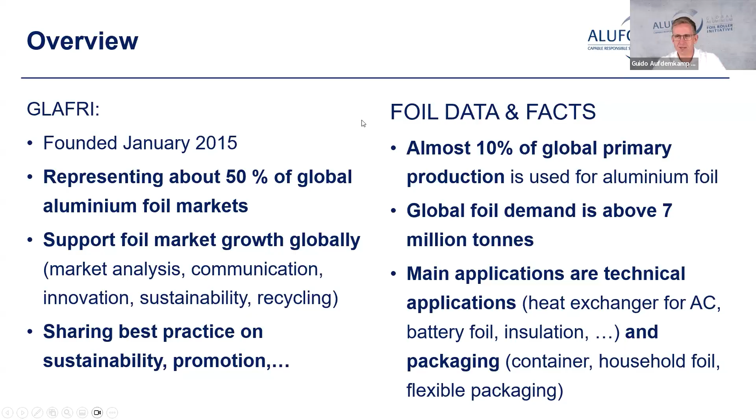Coming from an aluminium foil world, we have to consider also the language we are talking about. The aluminium world obviously talks about aluminium as a raw material, and often it is meant primary. That is usually the ingot form. It's the element raw material. When people using aluminium foil talk about aluminium, they actually mean aluminium foil. And that is all aluminium rolled below 0.2 millimeters or 200 microns. And that is usually delivered in coil form, as you can see here as an example.

That has a significant consequence, particularly when you talk about things like carbon footprint. So let's take that 4+ tons of CO2 equivalents are relevant for the primary production, and then you always have to add another ton for the foil production. So then obviously it makes a huge difference whether you talk about 4 or 5 tons. So please keep that in mind. I'll try to be always specific when I mean here primary aluminium or secondary aluminium or aluminium foil.

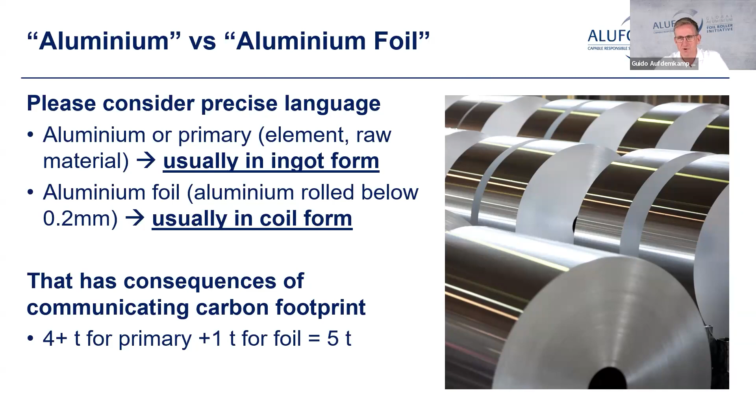So what is green or sustainable aluminium? That is often a question we are asked, how can we define green or sustainable aluminium? And meanwhile, we differentiate into 3 categories, so to say. So the most obvious one is the low carbon aluminium. That has a very direct environmental impact, usually even meant with low carbon primary aluminium. Then there is another version. You can have a high recycled content, which for all aluminium experts is clear. Then you have the direct environmental impact. And we will talk about how good this is as an indicator for green or sustainable aluminium. And the last and bit different one is the certified one.

And in the aluminium world, there is only the ASI certification available. That is more a holistic certification for responsibility in the value chain, so including also social impacts, not just environmental ones. And here it is also important that there is a pathway to reduce the impact, so the absolute impact is not the final figure for this certification.

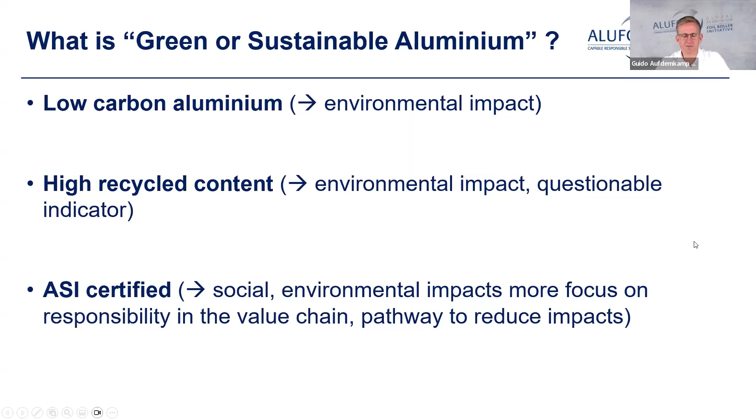So, whatever you talk about or what you understand, obviously green and sustainable aluminium has different meanings and can be understood different ways when two people talk to each other. Let's start with the environmental benefits of the recycled content. So generally, maximizing the recycling of all aluminium products after use, end of life, leads to an increased average aluminium recycled content in new aluminium products. That is not just for foil, that is globally.

Whenever you recycle aluminium, the natural flow of the material, because of its value, is to reuse it, to recycle it, and therefore it is kind of replacing primary aluminium, virgin aluminium, somewhere. So that is kind of the global thing. The problem starts when some users call for high aluminium recycled content in specific applications, in particular if that is at the detriment of others, because that does not necessarily result in a more circular economy.

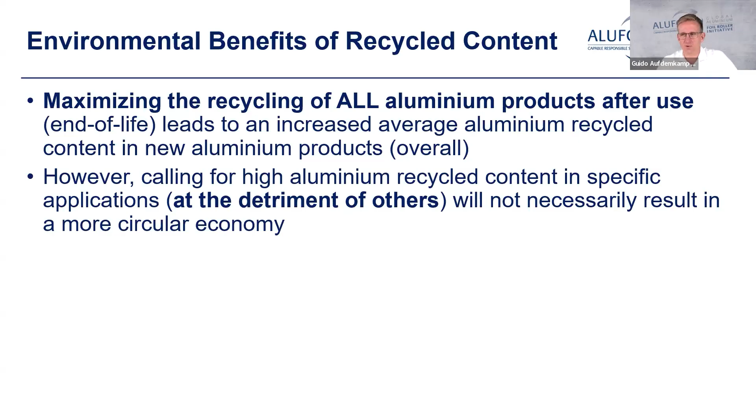Particularly when you have to redirect natural flows of the material so that only one or few applications get a high recycled content, that is usually paired with additional efforts, at least in logistics. So that's what we mean, that it's not necessarily resulting in a more circular economy. However, there are some few cases where a specific aluminium application is homogeneously collected, mainly alloy alike. So it makes very much sense to have a closed loop recycling.

And the best example here is a beverage can. That is a very homogeneous product, even globally, occurring in high volumes, so relatively easy to collect and to process directly into new cans. And I think you don't need any legislation for it. It is just a natural flow.

So that's good. In the EU, to assess the environmental impact of aluminium products, the product environmental footprint circular formula allocates also only a very limited benefit of recycled content as compared to the end-of-life recycling rate. So just 20% is allocated via the recycled content, but 80% is with the recycling rate. And the recycled content even comes a bit more from a steel perspective for the metals.

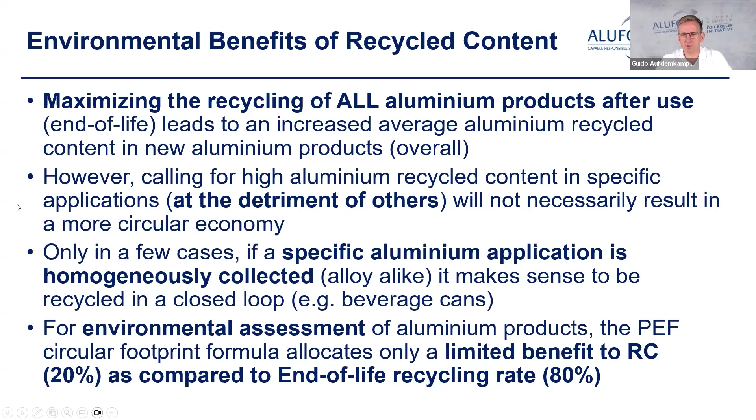So the lower the product environmental footprint must be, you have to mainly work on the end-of-life recycling rate, which is a benefit of all aluminium products. Talking about the recycled content, please bear with me, but I have to restate it. No recycled content without prior recyclability and recycling, because that is necessary. The definition is usually the proportion of recycled material in a given product.

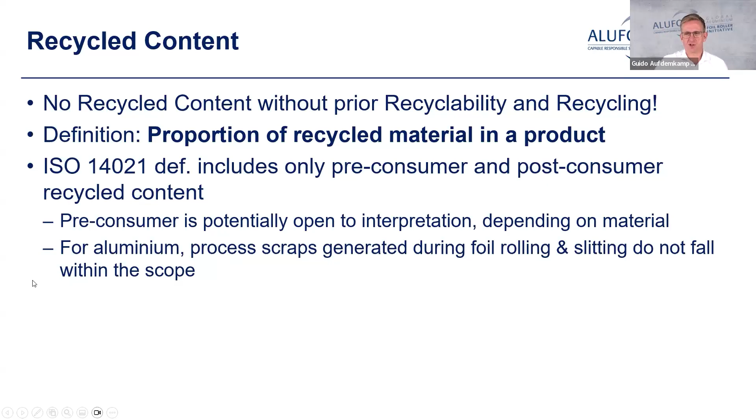And the ISO definition includes only pre-consumer and post-consumer recycled content. The pre-consumer, we see, is often very open to interpretation, also depending on the material. For the aluminium world, we consider the process scraps generated during any rolling or slitting operations do not fall within the scope. So that is very clear. All this scrap should not be considered, even under the ISO definition, as recycled content.

Looking at the latest European packaging and packaging waste regulation, they have included a mandatory recycled content for plastics, but also provide voluntary labeling for other materials, but that is only for post-consumer recyclates. So that is very clear.

In the future, when anybody wants to put something on the European market as an end product of packaging, then it's only post-consumer recyclate, either meeting the legal obligation in the form of plastics or in the voluntary labeling for other materials like aluminium. So that's very clear. Post-consumer is also very clearly defined. It is the final consumption phase of the material. I'm just saying this because there were also creative people suggesting that some production scraps at the customer level would be considered post-consumer, the first consumer, but that is not the one, it is the last consumer.

And what is very important along the value chain is, please take care of whatever you claim around recycled content. It is very important that you keep a very open and transparent communication, because only then people can follow what you give into the value chain, and there is no possibility of misinterpretation.

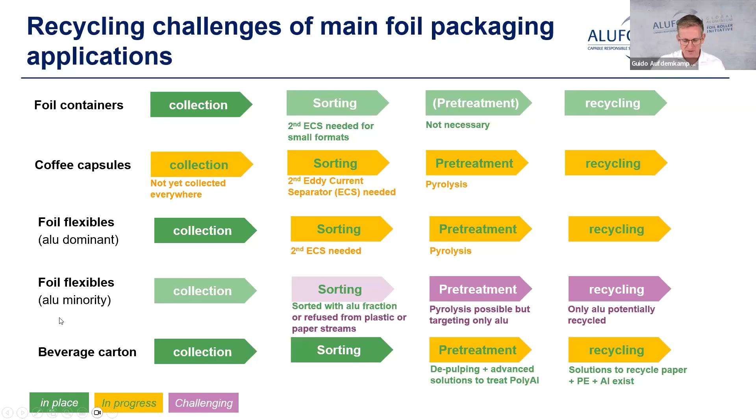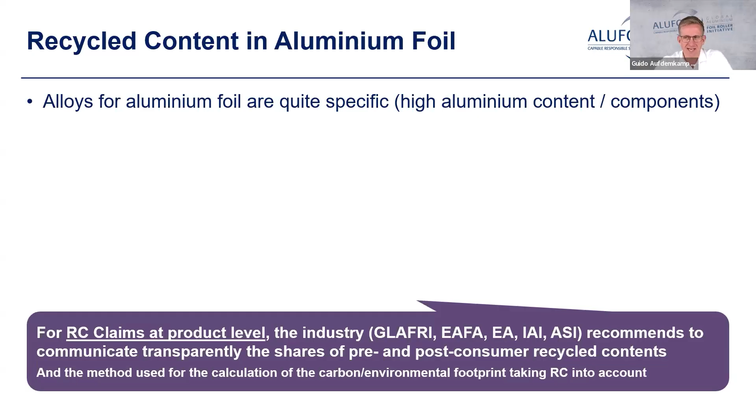So I'm just showing with this chart, it may be a bit more complicated than you expected or less complicated, however, aluminium foil is always very diverse in its applications and therefore also in how it is treated at the end of life. Now let's go to the recycled content in aluminium foil. The alloys for aluminium foil are quite specific, usually very high aluminium content with certain alloying elements limited, particularly for use in contact with food.

And to make it very clear, post-consumer recyclates can hardly be found in these kinds of alloys. And the main reason is that there is no separate collection of such applications to avoid decreasing the aluminium content or introducing undesired elements by mixing several alloys. So we in the Secretariat and many other colleagues we know are not aware of any really separate collection scheme of aluminium foil applications to really provide a post-consumer recyclate content.

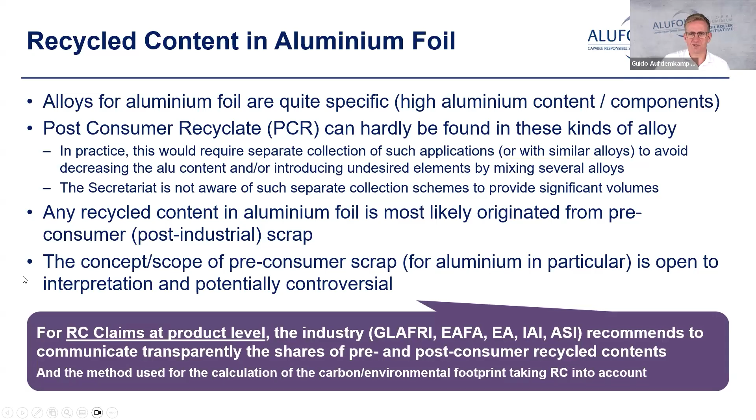So therefore, whenever we read about recycled content in aluminium foil, it is most likely originating from pre-consumer or post-industrial scraps or coming from other sources which are not aluminium foil. And here again, we, like basically the entire industry, really recommend communicating transparently the shares of pre- and post-consumer recycled content, because then this can also be calculated in a serious environmental footprint calculation. As said before, the concept of pre-consumer scrap is very open to certain interpretations and also controversial.

Talking about resource efficiency, that is my favorite chart, asking a politician: what is the better packaging in terms of resource efficiency or environmental benefits? A rigid pack with an 80% recycling rate or a flexible pack containing an aluminium foil with 0% recycling rate. And in probably 95 to 99% of the cases, I get the answer, of course, the packaging with a high recycling rate is better. 80% recycling rate just sounds better than zero.

However, when you then recalculate what is material loss, 80% recycling rate of a 70-gram can means there's 14 grams lost. While with a flexible pack weighing only 10 grams, the total material loss is just 10 grams. It's the entire pack. But 10 is less than 14. So that is usually when people start thinking. And I was not asking what recycling rate is better, I was asking which packaging is more resource efficient.

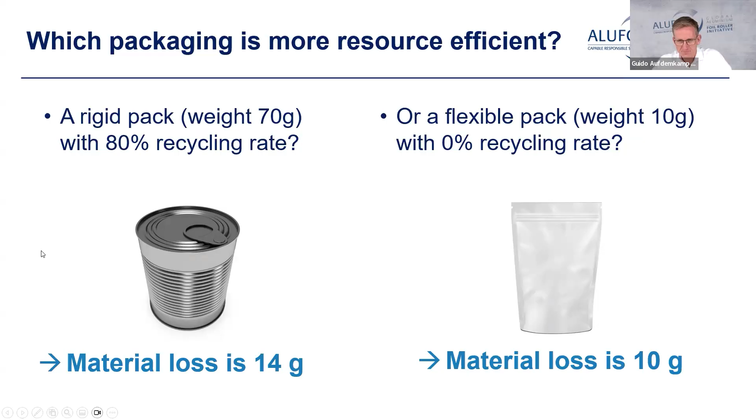And here we go to this topic of resource efficiency versus recycling. And usually the overall goal is to lower the total environmental impact of consumption and production. So basically, we want to have a better efficiency in the use of resources. And recycling can support this goal, but should not be the target in itself.

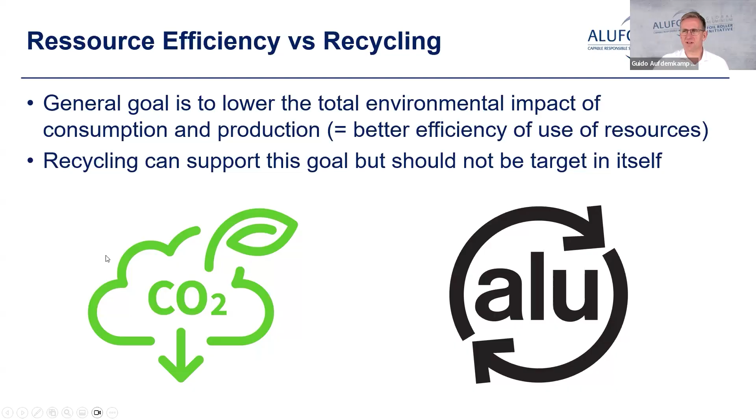Otherwise, we are increasing material thicknesses because that is way better to recycle, but less resource efficient. And I give you a very clear and scientific answer, an example to this, what that means in practice.

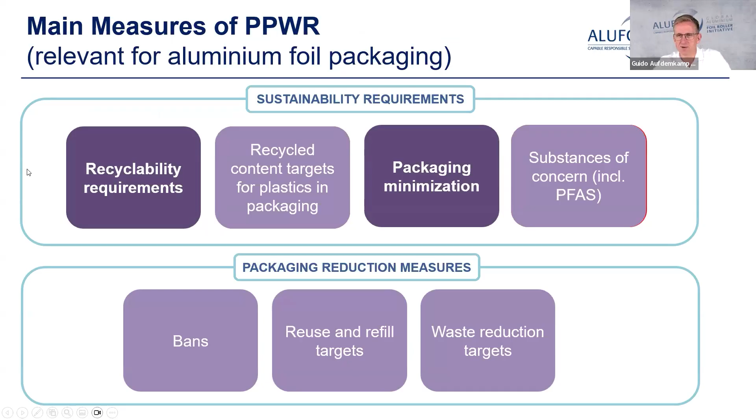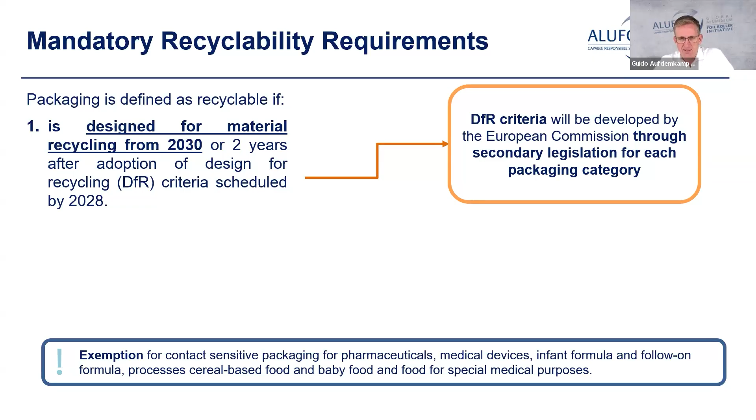So what are the mandatory recyclability requirements? Packaging must be designed to be recyclable. Otherwise, it cannot be placed on the market. And that means the packaging of a packaged product, so the entire product cannot be put on the European market. So the European Commission is now developing so-called design for recycling criteria, which will be published at the latest early 2028, so that they can enter into force in 2030.

Weighting gives a bit more flexibility to potentially, for example, exclude inks, adhesives, varnishes from the weight calculation. So then thin materials, particularly like aluminium foil, are not discriminated just by having a bit of ink on it, because the share of inks and lacquers is obviously much higher the thinner you go with the main substrate. And then we also have the recycled at scale issue. That actually means that by 2035, everything also has to be really recycled, not just designed to be recycled.

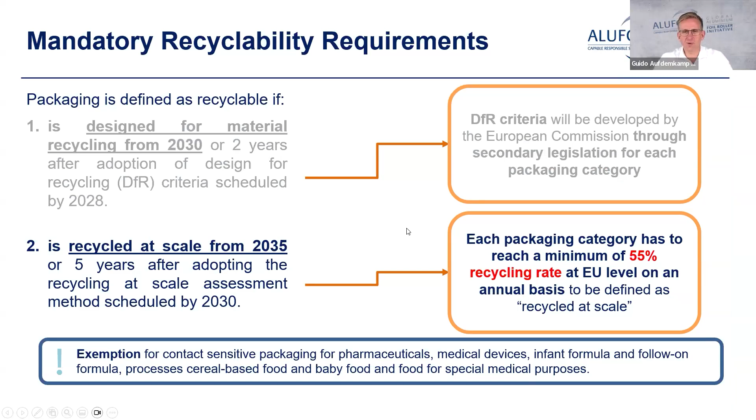That is then the 55% recycling rate on EU level, and then this has to be reached by each packaging category across the EU. So what consequences do these recyclability and other measures of the PPWR have for foil? So it is relatively

consensus that there will be less plastic and paper laminates containing aluminium on the market, because those will likely not be considered as recyclable. So targeting the aluminium is not enough to reach the 70 or 80% threshold for the recyclability performance grade. However, it might be that some more aluminium-dominant solutions increase.

Just think of a wet pet food pouch, maybe becoming more an aluminium foil tray; a classic paper-alu wrap for chocolate bars may become an alu wrap, which is already on the market but can go there. But also plastic coffee capsules are becoming more and more aluminium versions, also because of their recyclability. And you can name other examples here.

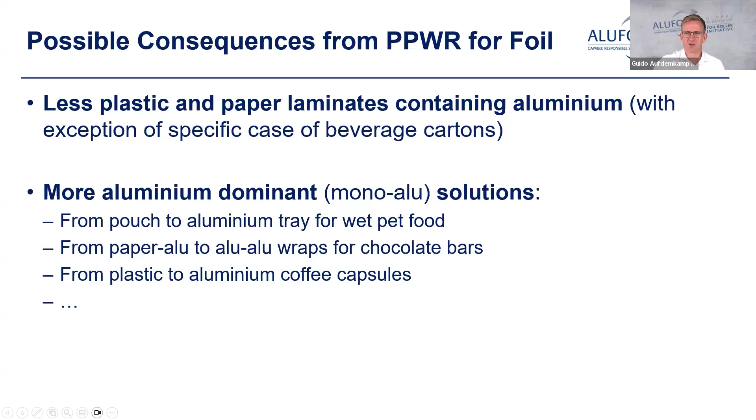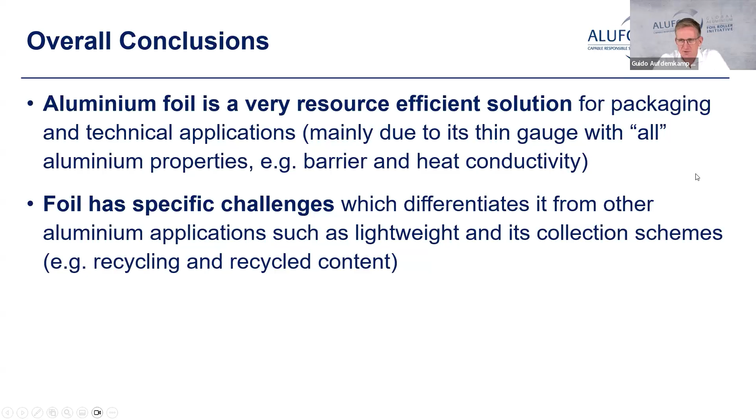So what are the overall conclusions? Aluminium foil is a very resource-efficient solution for packaging and technical applications, mainly due to its thin gauge with all aluminium properties such as barrier or heat conductivity. Foil has very specific challenges, contrary to the other aluminium areas, which differentiates it from other applications, such as being very lightweight, in its collection schemes, and therefore for recycling and recycled content.

And traditional and new applications of aluminium foil, such as battery foil, are enablers for a transition to a less impact world in the future.